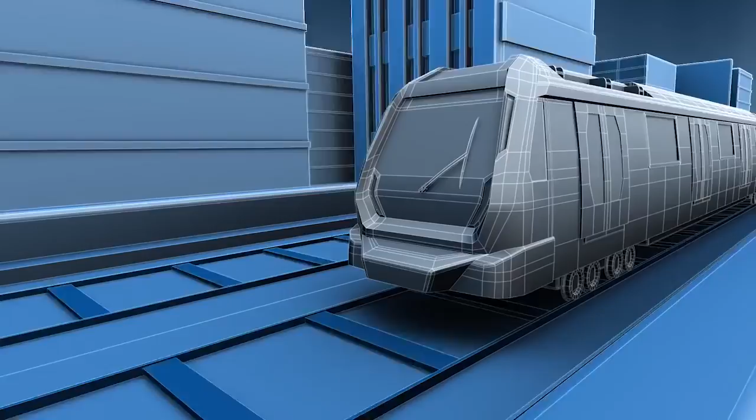A new transportation network is under construction in Kuala Lumpur. It is the KV MRT, the Klang Valley Mass Rapid Transit. The KV MRT's first alignment, the Sungai Buloh Kajang line, stretches a distance of 51 kilometers with 31 stations. A major section of the line is constructed above ground, while 9.5 kilometers is built underground. The KV MRT is part of a new transportation model that will change the infrastructure landscape of the Klang Valley.

I wanted a game changer, and I realized that for any modern metropolis to be vibrant, to be competitive, to be on par with some of the leading cities in the world, you've got to have a modern public transport system. The alignment will traverse through some of the most congested areas in the Klang Valley, challenging Malaysian engineers to deliver one of the most advanced infrastructure projects of the country.

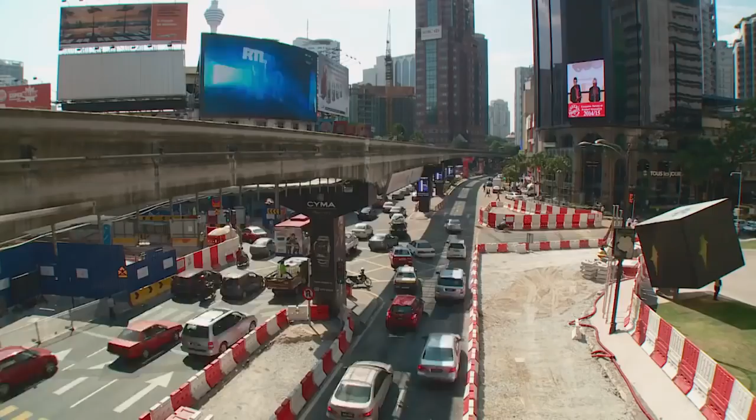Klang Valley or Greater Kuala Lumpur, a fast-growing metropolitan and home to 7 million people, with an expected increase to 10 million by 2020. This city is notorious for its traffic congestions. Every day, about 3 million cars enter the city centre. We need a good public transport system for Kuala Lumpur and the Klang Valley, because what we had was a public transport system which was not integrated.

In 2010, the Malaysian government initiated the Economic Transformation Program, ETP, to elevate Malaysia into a developed nation by year 2020. The objective of the program is really to transform the economy of Malaysia to become a high-income economy that is inclusive, at the same time sustainable. We could not help but identify Greater Kuala Lumpur or Klang Valley as one of those national areas of focus.

Part of the Economic Transformation Program, ETP, is to construct a mass rapid transit MRT system to create an integrated public transport network. We were quick to realize that it was just absolutely necessary for us to build a mass rapid transit in Klang Valley. We didn't think there was any other option. We couldn't rely on other forms of transport such as buses and taxis to do it. We really have to move a lot of people within the city so that it becomes a lot more livable.

The MRT system for Greater Kuala Lumpur will first include 2 new MRT lines spanning 103 kilometers, serving a radius of 20 kilometers of the city centre. With the construction of these lines, people will be able to travel between populated residential districts, commercial centres and key employment areas within the Klang Valley. The KV MRT project will play a vital role in creating a vibrant Klang Valley metropolis. Not only will it benefit its residents, but also propel the nation's economy with immense spillover effects on sectors such as the construction-related industries.

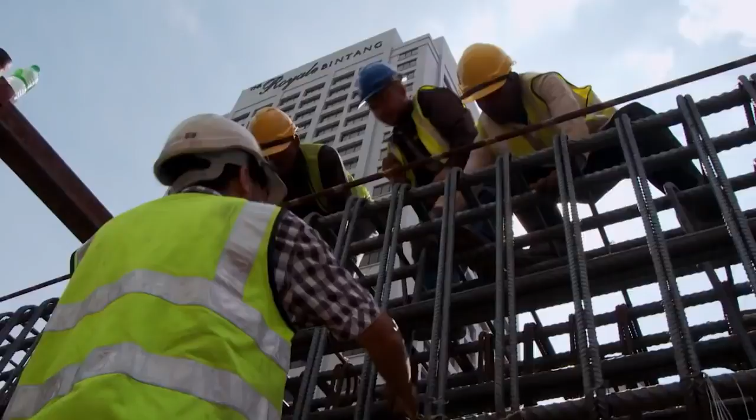In July 2011, the Prime Minister of Malaysia, Datuk Seri Najib Tun Razak, launched the biggest infrastructure project ever undertaken. It was his vision to improve the connectivity within the Klang Valley and radically enrich the lives of the people. The KV MRT's first alignment is the Sungai Buloh Kajang line. It will stretch 51 kilometers with 31 new stations, serving a population of 1.2 million people. The majority of the line is constructed above ground, while 9.5 kilometers is built underground.

To execute the government's mandate to complete the KV MRT project, MRT Corporation was formed with Datuk Seri Shahril Mokhtar currently helming the position of the Chief Executive Officer. Basically, MRT Corp is owned by Minister of Finance Incorporated. So our role is basically as an asset owner, as a project developer. And we are a so-called liaison entity between the project partner and also the government.

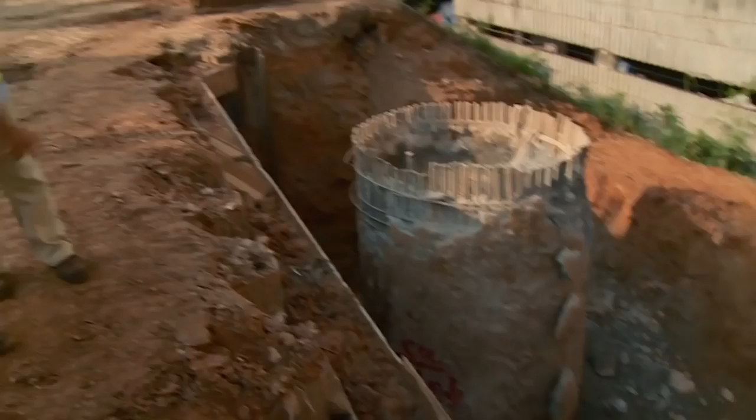On 10th February 2012, MMC Gamuda was appointed as the Project Delivery Partner, or PDP, for the Sungai Buloh Kajang line. The PDP approach is the best approach when it comes to building a major infrastructure project. The key element here is about risk. We basically transfer the risk to the project delivery partner in order for them to deliver the project within time, within budget, and they take up most of the risk.

A special MRT Exco committee was also set up to ensure that this project moves swiftly and smoothly. MRT Exco is very crucial in the whole spectrum of this project. The idea of having this MRT Exco is just to solve issues. It doesn't take long, maximum an hour, once a month. That is a very good platform in order to expedite the project. But constructing a new transport system in the Klang Valley is not an easy task.

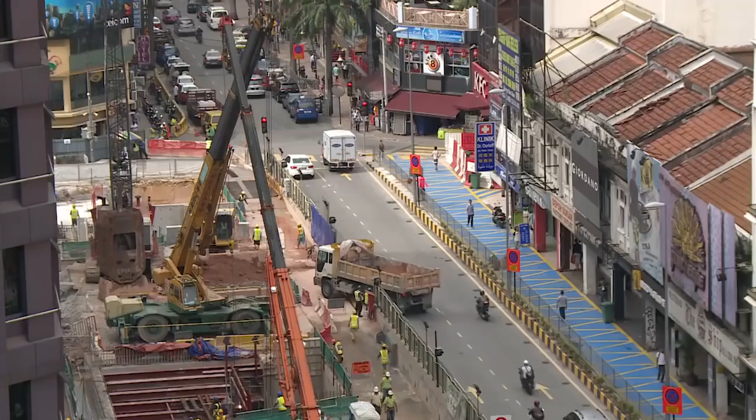Some parts of the KV MRT viaducts and stations weave through highly congested traffic areas. To ensure that all parties, whether it is the community or businesses adjacent to the MRT alignment, are well informed of the construction activities, stakeholder engagements are carried out. Community engagement to me is a very, very important part of the whole construction process itself, because you can't build something through a community without engaging them.

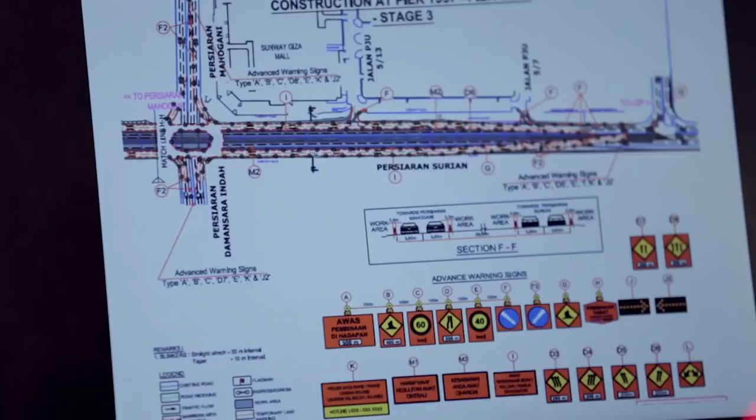For Line 1, over 3,000 engagement sessions have been held with residents, resident associations, business people, traders and other groups. To ensure that the construction of the KV MRT will create minimal disturbance, an extensive traffic management plan was put in place. Before we start any construction, we would have to plan the traffic management meticulously.

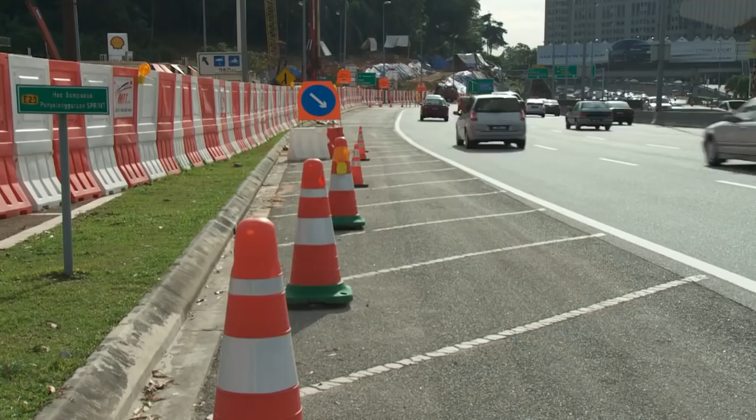What we do usually is we sit down in a room and do the desktop planning to tie in with the construction sequence. Then we do simulation. This is then followed by a trial road closure. This trial closure is to see what is the impact when we actually do it. This is done to validate our study and our simulation. Once the trial is successful, then we go for full implementation.

One of the most challenging traffic diversions ever to be implemented is at the Persiaran Surian nearby Sunway Giza. This is due to simultaneous construction of an underpass. That particular area, we are building the station. We are also building an underpass for the local authority, which is part of the project. And we have had to do the traffic management in 2 major stages.

In all this, we have a traffic management team on standby 24 hours to make sure that nothing goes wrong. If there's anything that we did not plan earlier, then we can take care of that immediately. Road user safety is always the #1 priority. Our work should not put the public at risk, and therefore that's why we would close roads. We would hold up traffic. Yes, it's an inconvenience, but it's for the safety of the public.

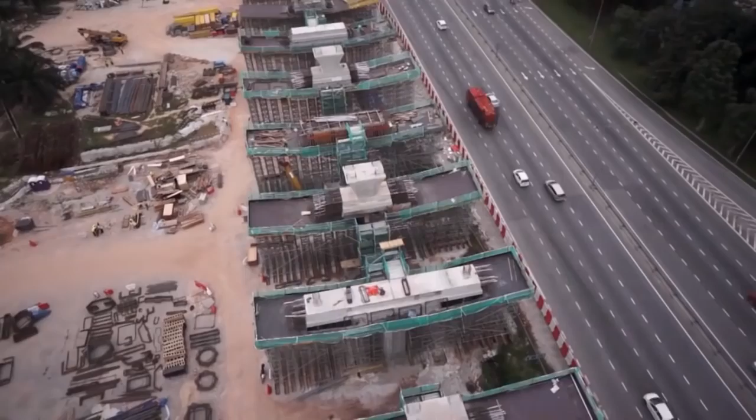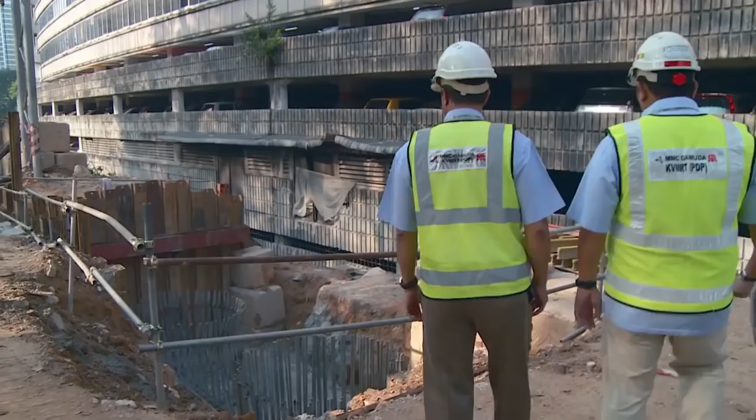The elevated section consists of 1,400 piers to support 17,000 segmental box girders that form the viaducts. There are 24 elevated stations and 2 depots, one at Sungai Buloh and another at Kajang. To ensure the success of this project, a strict procurement process was implemented. Companies were subjected to stringent evaluations to ensure that only the best, most experienced and competitive contractors were selected.

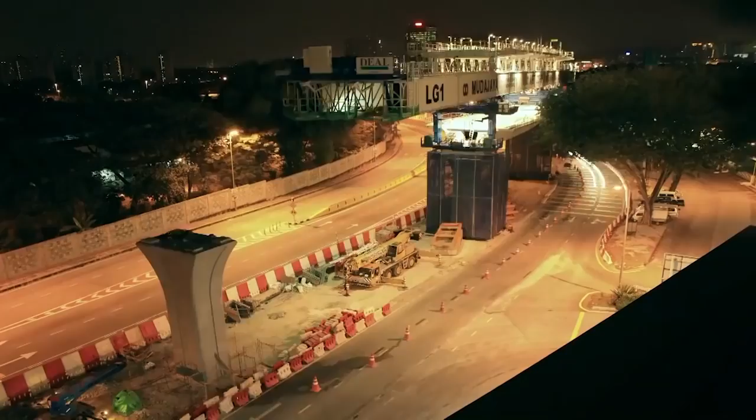There are 8 different work packages in the elevated section, divided into the northern package, which runs from Sungai Buloh to Semantan, and the southern package, which runs from Cheras to Kajang. 400-ton launching gantries were used to build permanent viaduct guideways by erecting the segmental box girders or SBGs. The gantry is basically a sort of a crane lifting mechanism. It lifts all the units together. It aligns them so they're all in a nice line. And at our peak, we had 21 gantries. That's a lot of gantries.

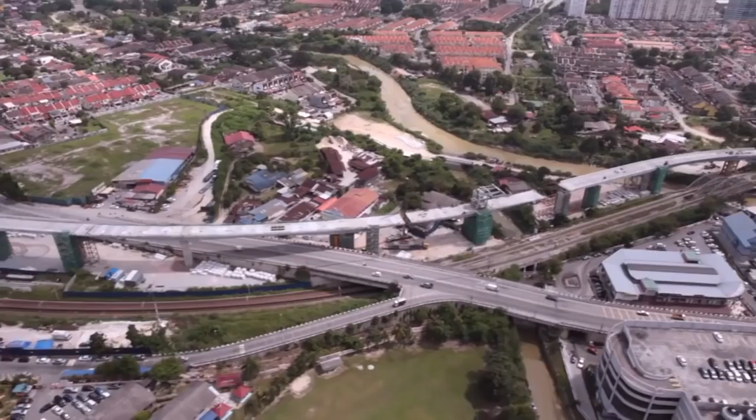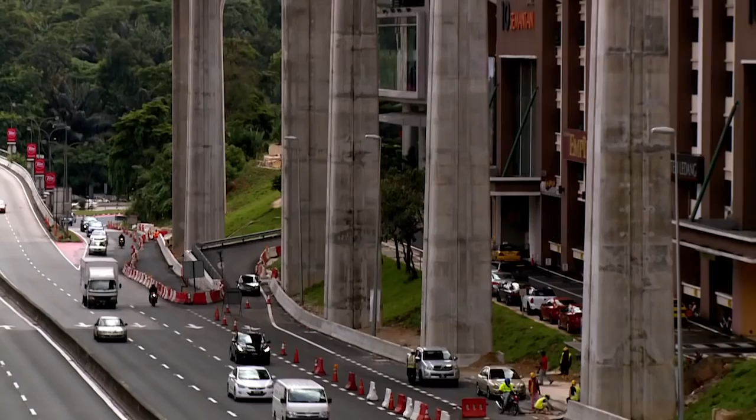The elevated guideways have to be built over existing roads and overpasses, making construction a challenge. The alignment itself must pass above the existing structure, name it a bridge or the highway. We have to pass above it. At certain areas, the viaducts are built at extreme heights. When we talk about the gradient or the slope for a road, it can go up to 10%. But for train, it cannot go more than 3% because of the way the train operates. Okay? Otherwise, on rainy days, it will slip. That's why in some areas you will see that the piers will be very, very high to make sure that the vertical alignment is maintained throughout the whole stretch.

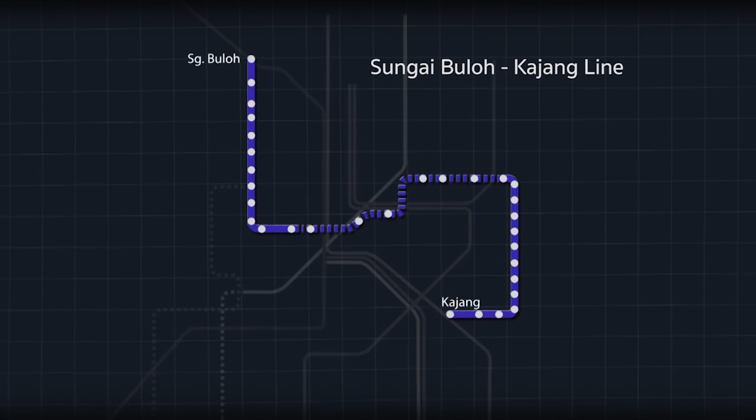While the majority of the line is built above ground, 1/5 of the Sungai Buloh Kajang line is constructed below ground. This is the biggest challenge faced by the construction team. The KV MRT's first alignment, the Sungai Buloh Kajang line, stretches a distance of 51 kilometers. To accommodate the construction within the city centre, 9.5 kilometers of the alignment is underground. For city centres, really the best thing is to put it underground. You don't have to demolish too many buildings. We're not looking to destroy areas, we're looking to enhance areas.

The design and construction of the underground works was awarded to MMC Gamuda KV MRT Tunnelling Sendirian Berhad for their extensive tunnelling experience and technological know-how. The underground section stretches from Semantan to Maluri while passing through 7 underground stations: Museum Negara, Pasar Seni, Merdeka, Bukit Bintang, Tun Razak Exchange, Cochrane and Maluri. To build the tunnel, tunnel boring machines or TBMs were used to excavate rock and soil with special tools fixed on a rotating cutter head.

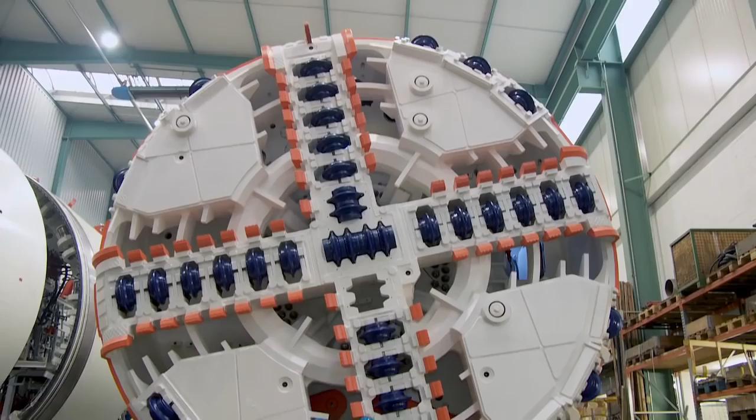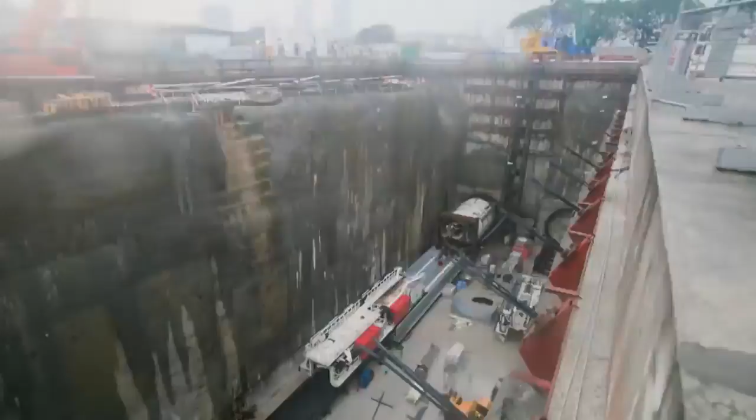MMC Gamuda KV MRT, working with German company Herrenknecht, came up with a revolutionary kind of machine, the variable density TBM, the first of its kind in the world. The first variable density TBM arrived in Malaysia in the beginning of 2013. Transporting the TBMs to the sites through Kuala Lumpur was a challenge that needed detailed coordination. After 3 months of assembly, the first TBM was ready to begin mining.

The launch of the first variable density TBM was officiated by the Prime Minister of Malaysia, Datuk Seri Najib Tun Razak on 30th May 2013.

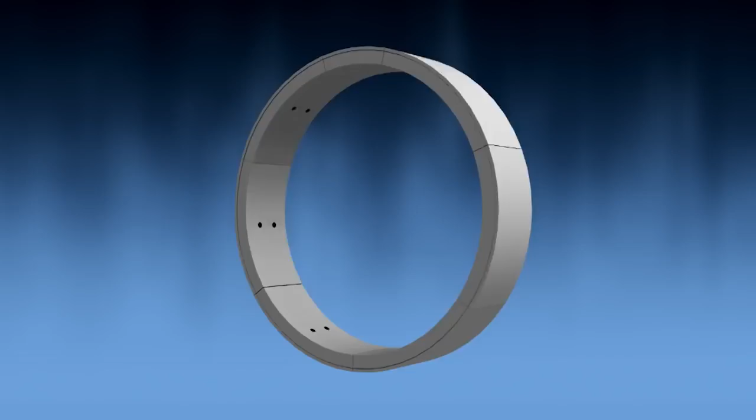The TBM is equipped to both excavate and build tunnel rings, which form the lining of the tunnel. Each ring consists of 7 segments and 1 keystone. A total of 11,500 segments were needed to line the dual 7.8-kilometer tunnels. Tunnel walls need to be strong enough to withstand extreme pressure and chemical attacks from the ground and water, and to also endure settlement caused by poor ground conditions.

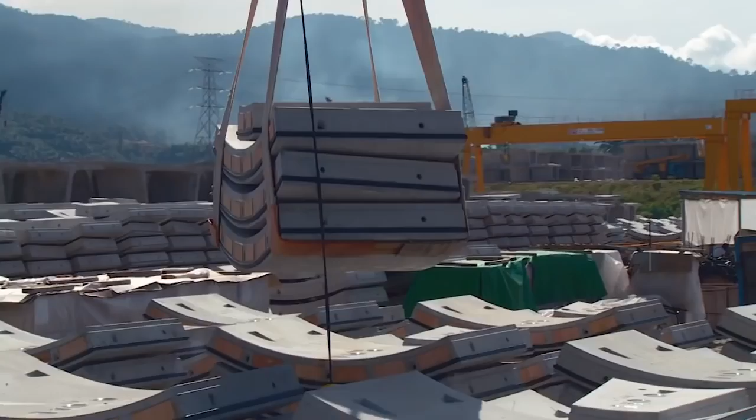The tunnel segments were manufactured off-site at 3 different factories. We are adopting the technology we call steel fiber reinforced concrete, where we use a staple-like steel fiber to replace conventional thick and heavy rebar. On top of that, we are using another fiber called polypropylene fiber to improve the fire-resistant properties of our segments.

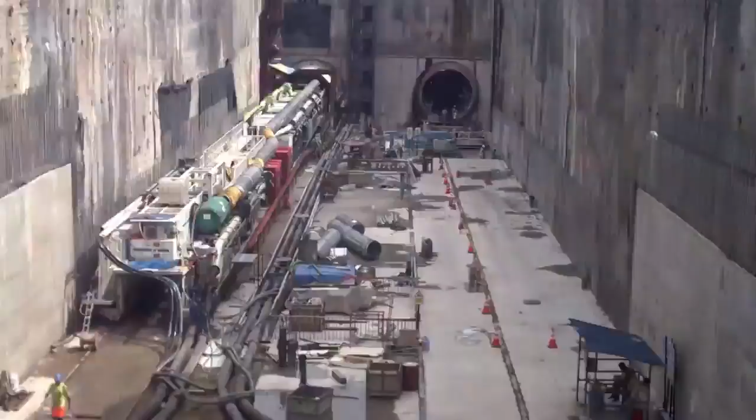8 TBMs were used for this project. 4 TBMs were launched from Cochrane, 2 TBMs from Semantan North Portal, 1 TBM from Inai Shaft, and 1 from Pudu Shaft. The MRT tunnelling project required thousands of workers over the 2-year period of construction, and MMC Gamuda set up an academy to train the hundreds of local workers needed for the underground construction works.

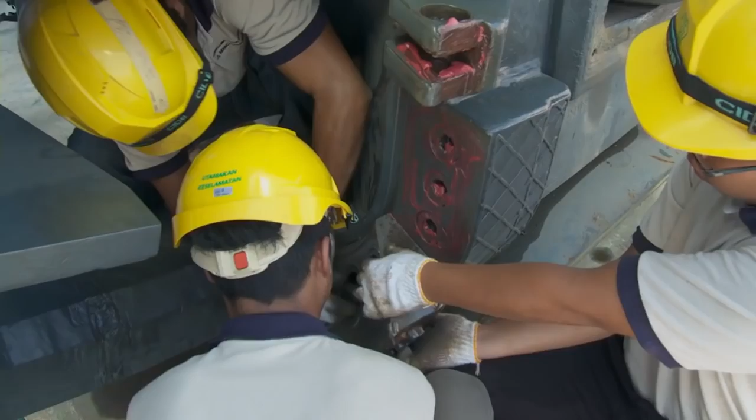The Tunnel Training Academy, TTA, was the first of its kind in the world, with the aim to develop a workforce of highly skilled Malaysians who are proficient in the specialized field of tunnel construction. To date, over 16,000 professional and skilled workers have been trained at the TTA in various fields to support the tunnel and underground construction works, in particular for the KV MRT project.

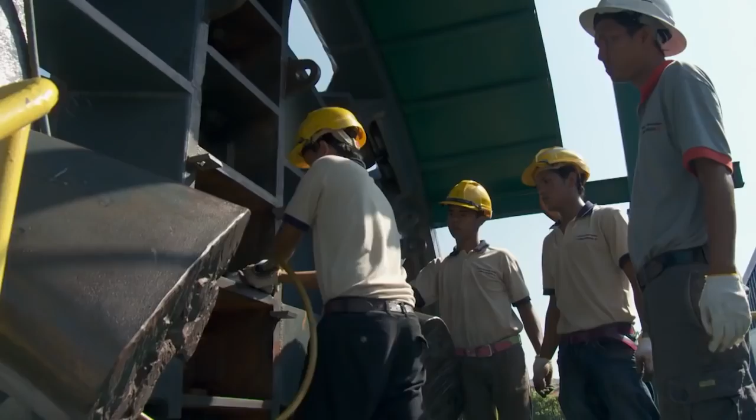I think the training of locals is very important. You need people to have the expertise. They've gone through the training school to learn the basics, and then they've actually been put out on site and seen it in action, and that's enhancing their skills.

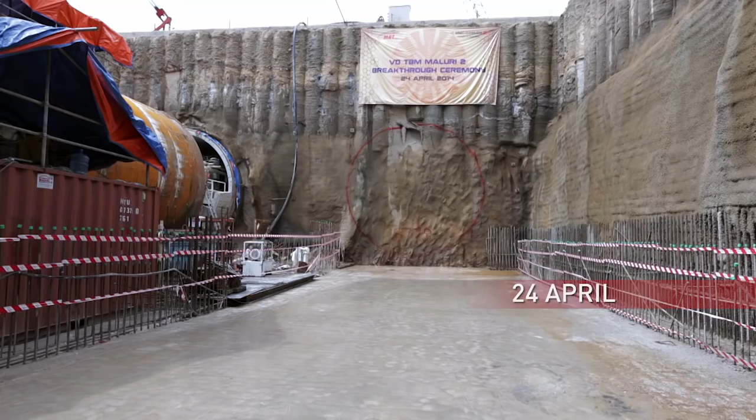The first 2 TBM breakthroughs were at the Museum Negara station on 24th December 2013 and 16th January 2014. The machines were then pulled through and relaunched to continue tunneling towards the Pasar Seni station. On 24th April 2014, the 5th breakthrough occurred at Maluri South Portal with a big splash. This was the midpoint of the tunneling works.

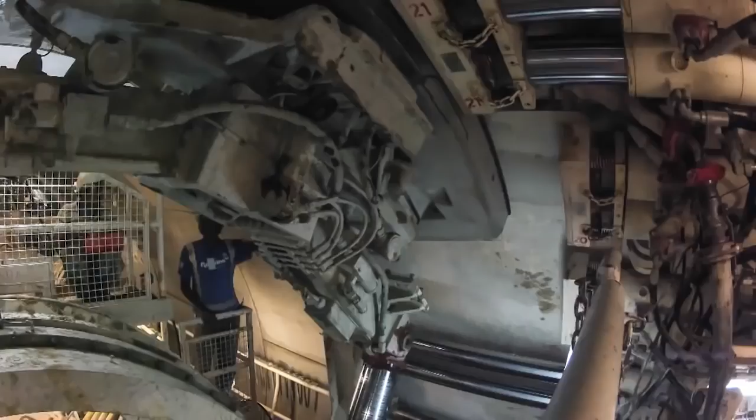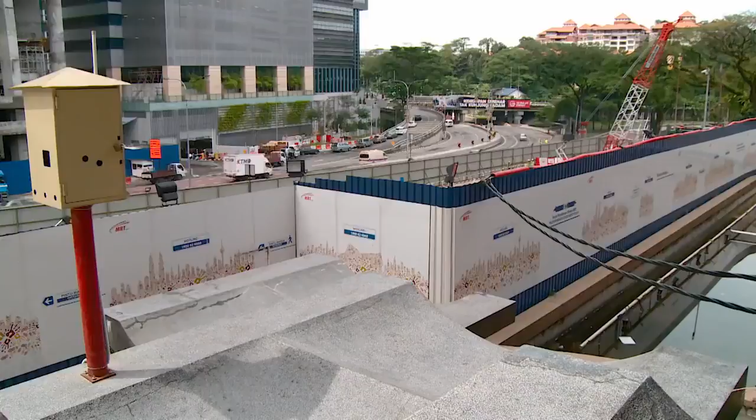While construction of the tunnels is in progress, work is carried out on the 7 stations. Located right beside the Museum Negara, the station is connected to the KL Sentral Transport Hub. One big challenge here is to ensure the safety of the National Heritage Building. Daily monitoring works are carried out on the structure and the mosaic murals. During the construction, we have allocated more than 200 instruments to monitor the Museum Negara building condition through all the days of our construction.

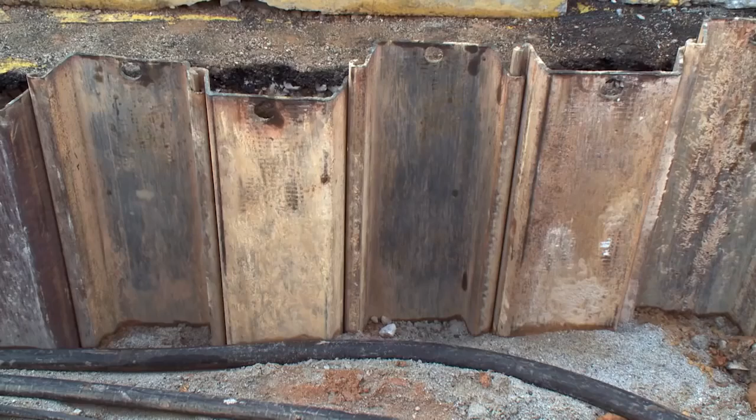The Pasar Seni station is located in Chinatown and connects to the existing Pasar Seni LRT station. Construction of this station required extensive protection of electrical cables that are part of the national grid. While we were doing excavation, we got a big surprise. We found a 132 kV cable. This cable carries power for a third of Kuala Lumpur. A power cut here could cripple part of the city. We cannot afford that to happen.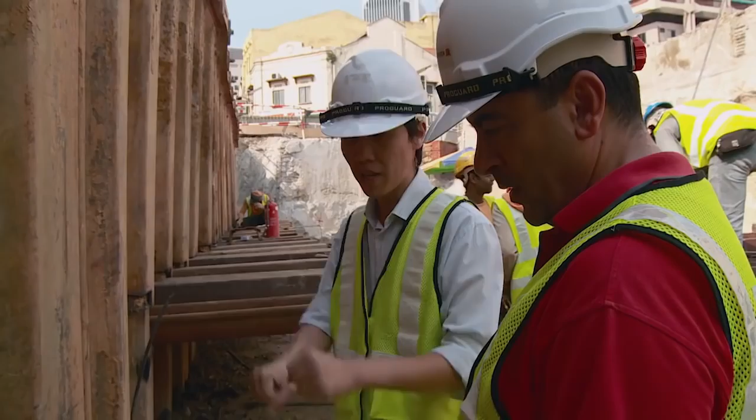A steel protection box had to be constructed to protect the 132 kilovolt cables located beneath the road. The authorities insisted the cable stay in place. It cannot be moved at all. So the only option left for us was to build a steel box to support the cable so that we can work and excavate underneath.

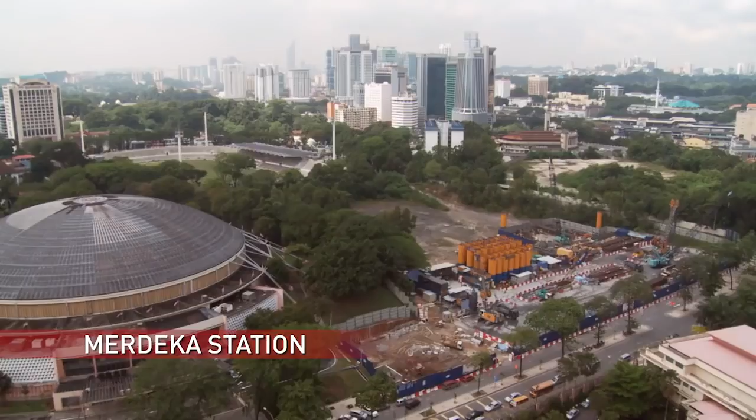All excavation works at the Pasar Seni station have been completed without any power disruption to the city. The Merdeka station is located close to the Stadium Merdeka and Stadium Negara. Over 30 meters deep, steel struts were required during the excavation works. The main challenge of this station is to construct 6 layers of strutting. We use up to 4,000 tons of steel in order to provide the earth retaining system strutting for our station.

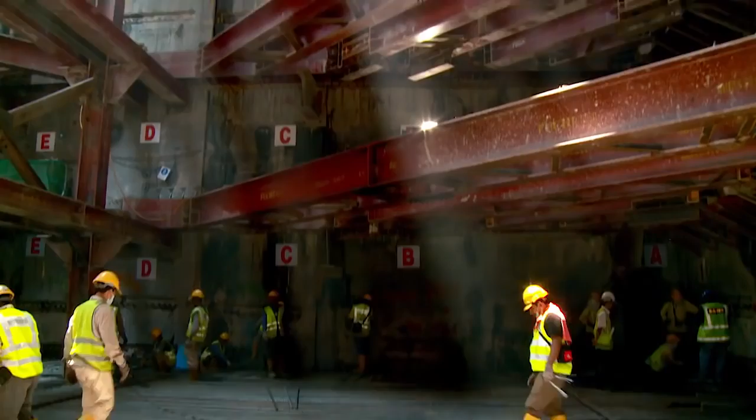Located in the heart of the Golden Triangle, the Bukit Bintang station is constructed in phases to ensure that traffic is not disrupted. So the challenge for this area is traffic, definitely, because we have restricted hours. There are a lot of cars, and also a lot of public. Our challenge here is basically to maintain the environment with minimal disturbance.

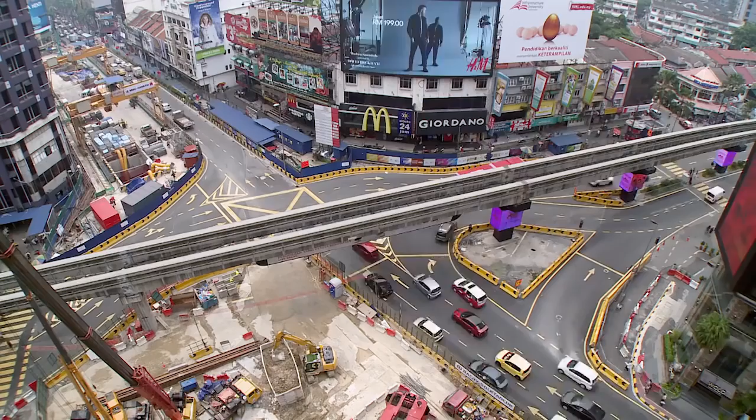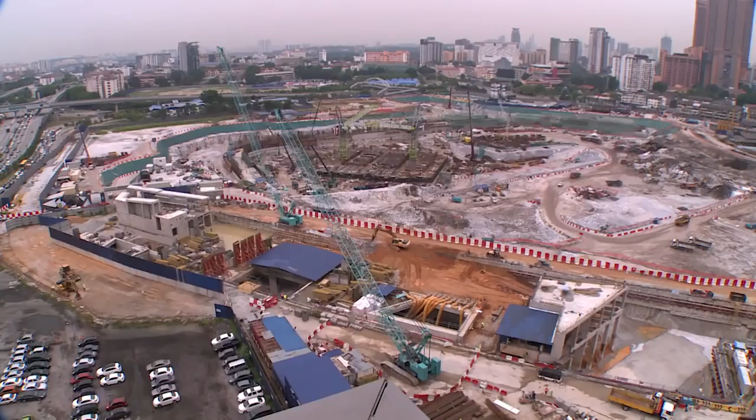The Tun Razak Exchange Station is located nearby the future Tun Razak Exchange development. This is the deepest underground station with a depth of 45 meters. It is built to connect with the future Line 2, the Sungai Buloh Serdang Putrajaya line. The Cochrane station is within an area being transformed by large urban regeneration projects. Over 35 meters deep, the station works are moving forward quickly. Located beneath Jalan Cheras, the Maluri station was constructed in stages to ensure continuous traffic flow.

On 11th April 2015, the last TBM finally arrived and broke through at the Pasar Seni station. It is a thrilling moment for the engineers and tunneling team. The machine is the first TBM launched in the project from Cochrane, and it has mined the longest distance of 5 kilometers. I'm very happy. My team performed very well, and in fact for tunneling we are a few percent ahead of schedule. And it's all dedicated to this team of people who work so hard.

This is the last breakthrough. I have attended a few breakthroughs, all done very well. It's very good, we have proven ourselves. You can see 10 TBMs have already been successfully implemented and completed without any problem to the surroundings. So you can see it's proven already. So I think we are very happy now. And we are very confident that we can do more in the coming future.

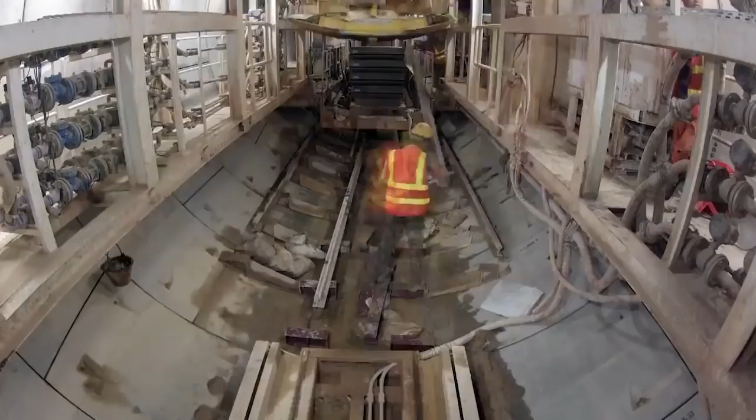The success of the variable density TBM resulted in a 95% reduction in the incidence of sinkholes for the KV MRT Sungai Buloh Kajang line compared to tunneling for the SMART tunnel under the same geological conditions. The astounding innovation of the variable density TBM was internationally recognized and was awarded the International Tunneling and Underground Space Awards 2014 for the Technical Innovation of the Year category.

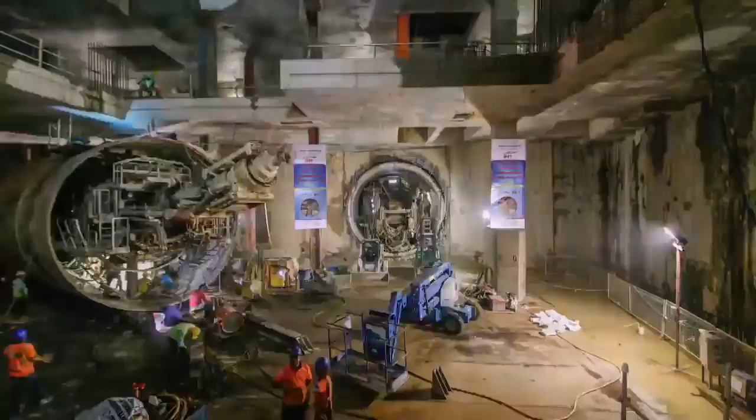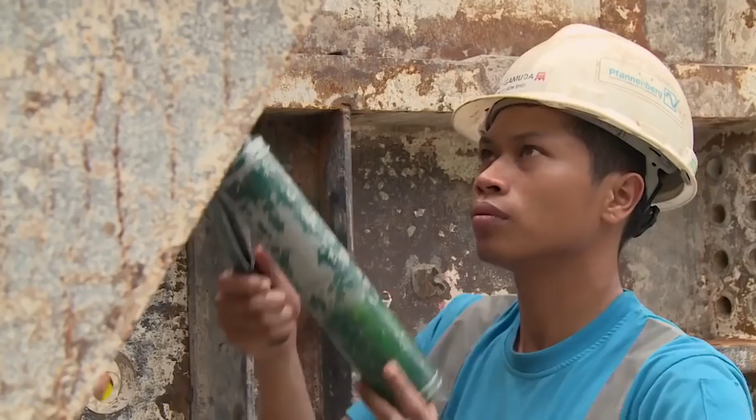As tunneling works have been completed, the TBMs were retrieved and sent to the TBM refurbishment plant located in Pusing, Perak. Here, the TBMs are being cleaned and their sensitive electrical components disassembled for storage in preparation for future projects. The facility, the first in Malaysia, will enable the transfer of TBM refurbishment technology to Malaysians.

As work progresses at the underground work sites, accidents are the biggest worry for the construction team. To ensure that the teams are prepared, drills are carried out regularly. Accidents at the underground sites can be catastrophic to the construction progress. To ensure that the teams are prepared, emergency and rescue drills are conducted frequently. Every 6 months, we have to carry out the emergency drill to give exercise to all of our workers. If an actual incident happens, we are prepared for the incident.

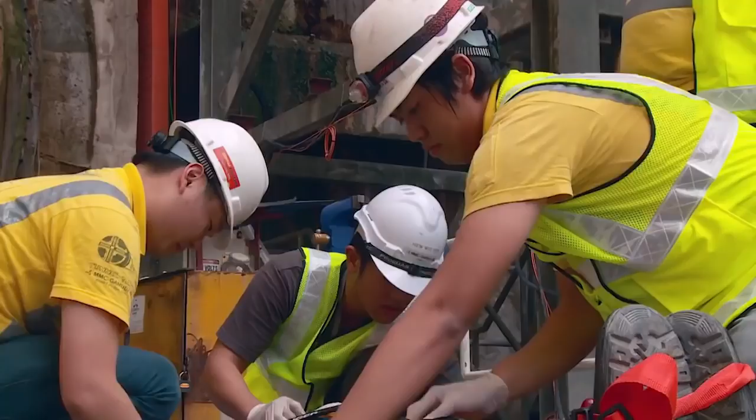The teams are tested on how well they can respond to an emergency and to evaluate their actions and response time. We want to ensure that the emergency response team is always prepared and ready in the event that a real emergency happens. At all the underground sites, engineers and workers are trained on safety awareness. MMC Gamuda KV MRT Tunneling Sendirian Berhad has raised the delivery and safety benchmark for the local construction industry to be on par with international standards.

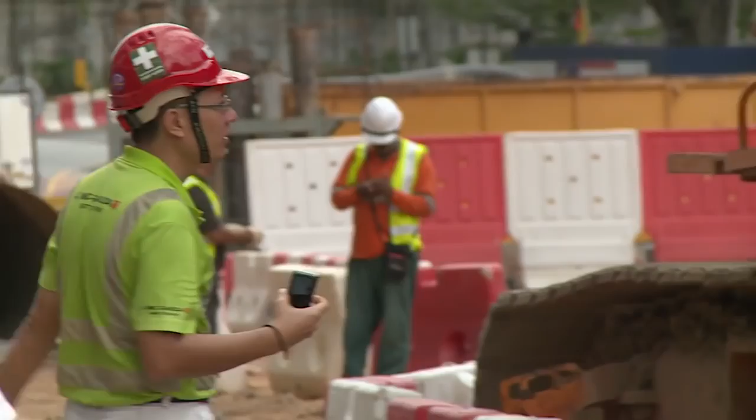Monthly audits are done by safety officers at each site to ensure they adhere to all safety requirements. This is our company policy to ensure that workers are safe to work here. So we are doing a routine monthly audit to ensure those safety rules and regulations are complied with, to ensure the site is safe to work. Of course, the workers are our valued asset, so we make sure those who are working here are safe. In April 2015, MMC Gamuda KV MRT was announced a winner of the International Safety Award with distinction from the British Safety Council in recognition of its commitment to health and safety management.

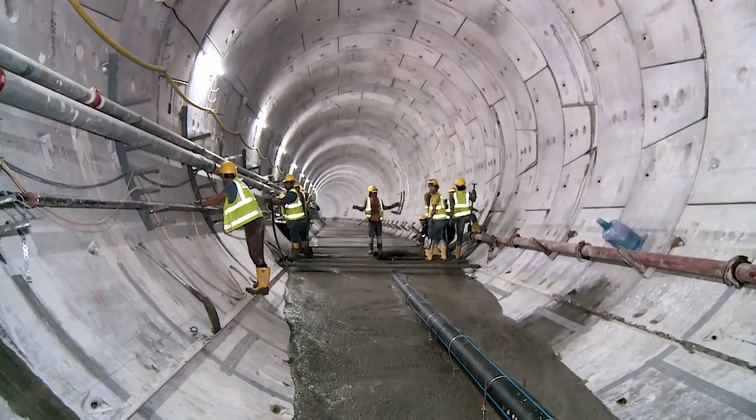Once tunneling had been completed, concreting of the tunnel base was carried out. Laying of the tracks for the underground section and the elevated sections were done concurrently. On the main line end to end, we use the slab track, using resilient base plates to mount the rail so as to minimize any noise and vibration of the track. To reduce noise pollution along the alignment, noise barriers are also installed.

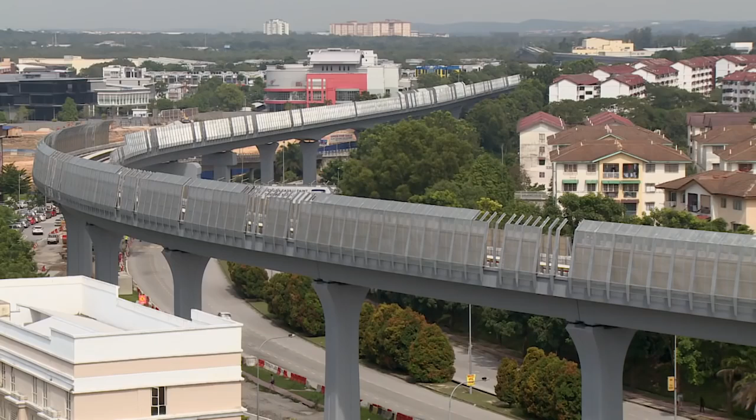When we were doing the design, there were certain areas that were very close to residential areas. And what we did was we engaged noise consultants to do simulations to see what the noise level would be when the trains start operation. The Institute of Noise and Vibration, Universiti Teknologi Malaysia, is a national center of excellence in noise and vibration. And we undertook detailed analysis to determine locations that may be affected by noise and vibration along the entire alignment. We were then involved in the detailed design of noise and vibration mitigation measures along the alignment.

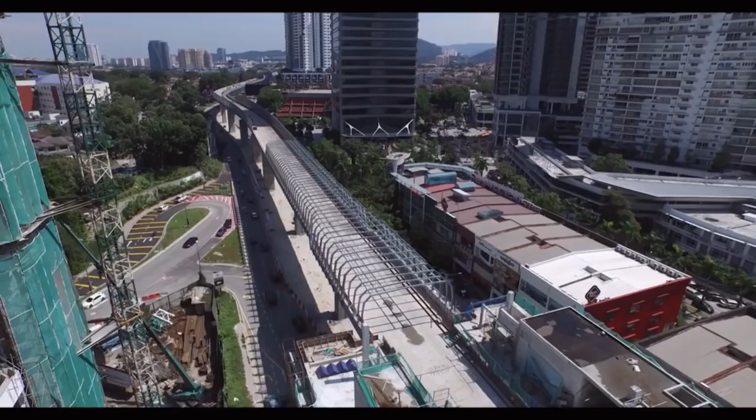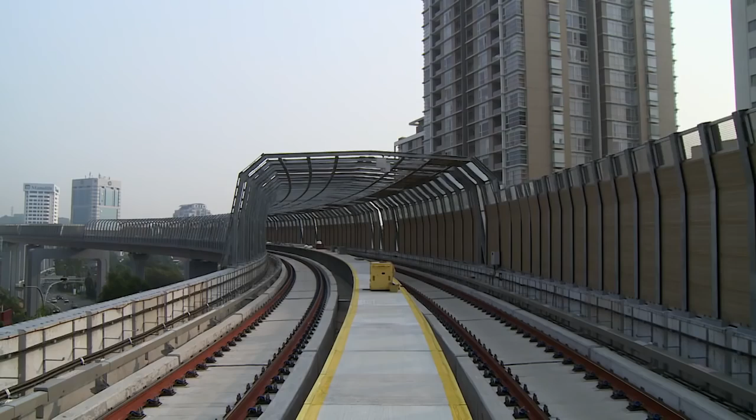As advised by the consultants, 3 types of noise barriers were installed to control the noise propagated by the train operation. The first type is a short vertical kind of barrier. The second is a bit higher. It has a small canopy towards the inside that mitigates the noise further. And the third category is a full enclosure to maximize the suppression of the noise generated.

Along the Sungai Buloh Kajang alignment, there are 24 elevated stations that all have a unifying design and look. They wanted an identity to the station, and they wanted a master identity to the line. So the way we always look at design is that we look at the essence and we look for something that's going to express something Malaysian about the station.

The design and concept of the elevated stations are inspired from the Malay Wakaf, a traditional shelter for travellers. The idea of the station was, we call it wakaf, wakaf being a sort of pavilion structure that you find usually in the landscape, synonymous with paddy fields and things like this. But the idea of wakaf is also that the transportation is a sort of a gift to the people. It's something for the people.

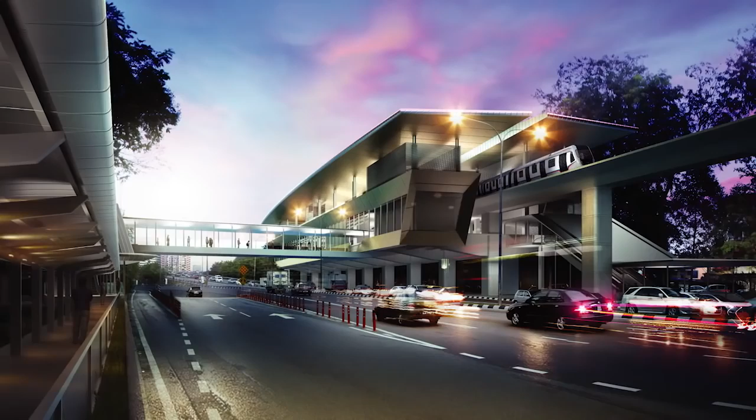In keeping with the Malaysian identity, the station design is in tune with the country's environment. It should become a tropical station. You know it's a tropical station. So what's the first thing? It's big overhang roofs, natural daylight, naturally ventilated, some sense of greenery, public plaza attached to that. So these were all a series of ideas under the umbrella of the concept of a wakaf.

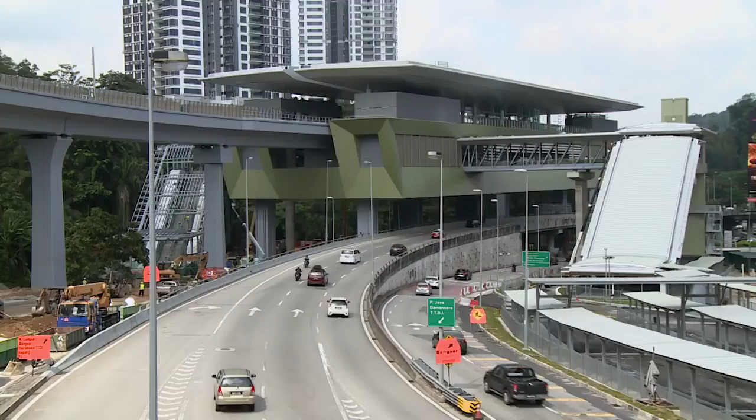Sustainability was also a main consideration. A repetitive design, obviously, there is some efficiency to doing that kind of design. In terms of construction, you can do all the prefabrication of all of this off-site. So there is a sustainable component to making all of them consistently in one kind of design. The extended overhangs of the station's roof will help reduce direct sunlight and incoming rain.

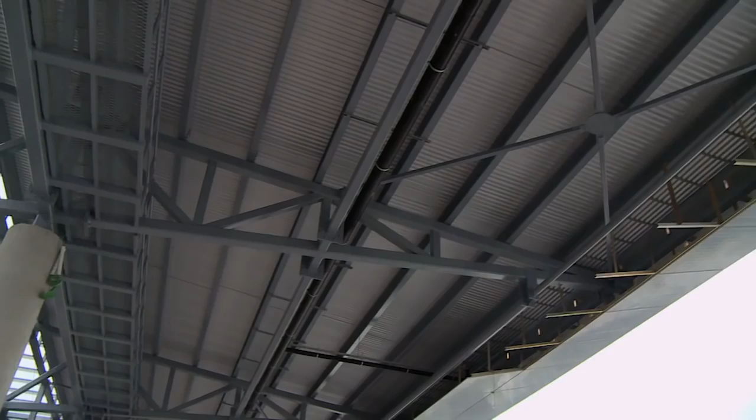These structures have huge roofs. They are collecting rainwater for basically all the toilet facilities and water use within the building, and later to harvest solar with PV cells on top of it. So all of that they already actually integrated into the design.

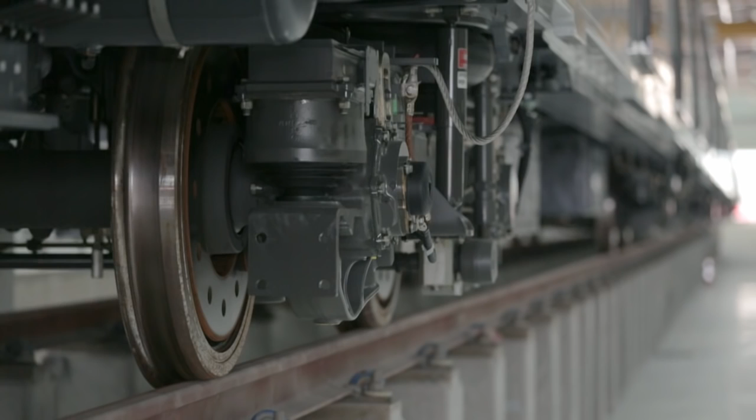To minimize power consumption, the train traction power system has also been designed to accept regenerated electricity as the trains decelerate. They're actually implementing brake energy, energy from the brakes of the trains itself, onto the energy collection for the buildings. So they're adopting a few of these elements of sustainability within the building.

For the underground stations, the architectural design concept for the ground-level entrance structures is inspired by the multifaceted quartz formation of Kuala Lumpur's Klang Gates Quartz Ridge. The 16-kilometer long ridge is the longest of its kind in the world. We took inspiration from it, in that the multifaceted shape of the quartz crystal and its multi-coloured reflections sort of resonate with the multiracial spirit and the cultural richness of Malaysia.

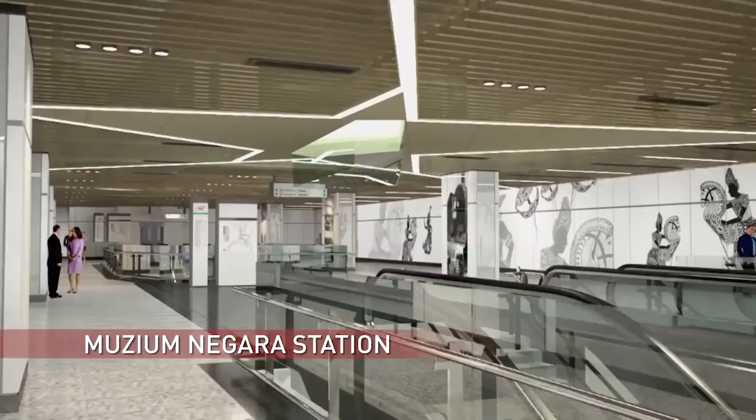Each underground station has individual design themes that reflect each station's unique site and historical context. Muzium Negara Station is located next to the National Museum. The theme, Transition, is based on the museum as a treasure trove of all things old in contrast to its neighbouring new development. At its concourse level, columns with glass cladding depicting modes of public transport from yesteryears provide a sense of nostalgia in an otherwise sleek and contemporary station interior.

Pasar Seni Station is located nearby the meeting point between Sungai Klang and Sungai Gombak, thus the theme Confluence. Being the birthplace of Kuala Lumpur, the concept of the interior design is a tribute to this confluence by stylizing its Y shape into a contemporary design motif.

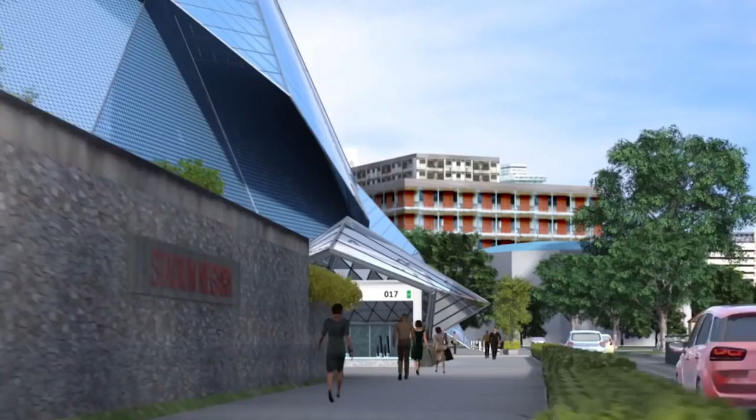Merdeka Station is located nearby Stadium Merdeka, where independence was proclaimed in 1957. The theme for the station is Independence. Here, patriotic images will be featured, including the proclamation of Merdeka by the late Tunku, as well as text of the Rukun Negara. This station will be integrated with the future KL 118 development, which will be the tallest building in Malaysia.

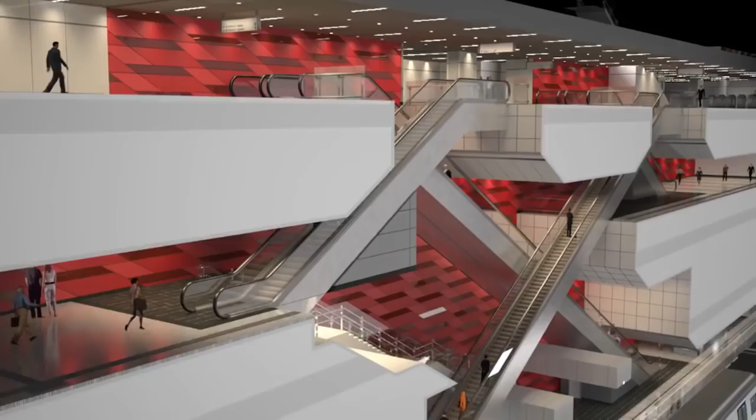The Bukit Bintang Station is located at the Golden Triangle of Kuala Lumpur, a place that never sleeps. The theme of the station is dynamic. The ever-present dynamism and vibrancy of this area is expressed in a bold, 4-story high feature wall composed of a dynamic trapezoidal geometry in different tones of red that suggest movement.

The Tun Razak Exchange Station is located at Kuala Lumpur's future financial district. As Malaysia is at the forefront of Islamic finance, the theme of this station is Islamic Corporate. The station design will project an Islamic identity with contemporary, formal and corporate ambience. Islamic motifs will be expressed in the columns, walls and ceiling.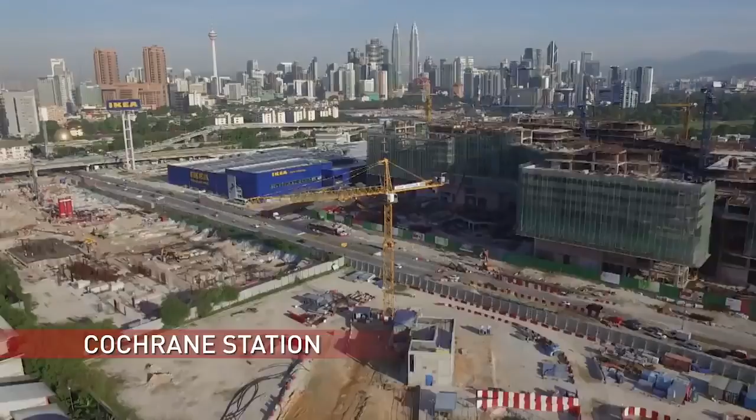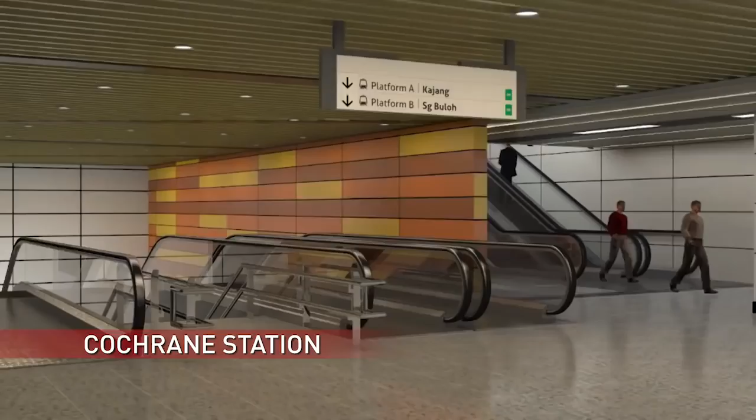Both Cochrane and Maluri stations are located in parts of Kuala Lumpur which are currently being transformed by 2 large urban regeneration projects. It is envisaged that both stations will play a major role in injecting vibrancy to the site contexts. The theme for Cochrane Station is urban living, while for Maluri Station is new generation. In both stations, a combination of colours are used to bring a fresh, fun and cheerful ambience.

Another unique feature of the underground stations is the concept of incorporating ideas by local young talents to design the bench for each of the stations. An Art Express initiative, a bench design competition was introduced by MMC Gamuda KV MRT. We decided to invite younger talent, younger brains from colleges and universities to participate in a competition where they could come up with something.

After going through a judging process, the final 3 designs were displayed at NU Sentral. Here, the public were able to vote for their favorite bench design. I think it's great in having different designs, a variety to choose from, and having it displayed, the public can choose from it.

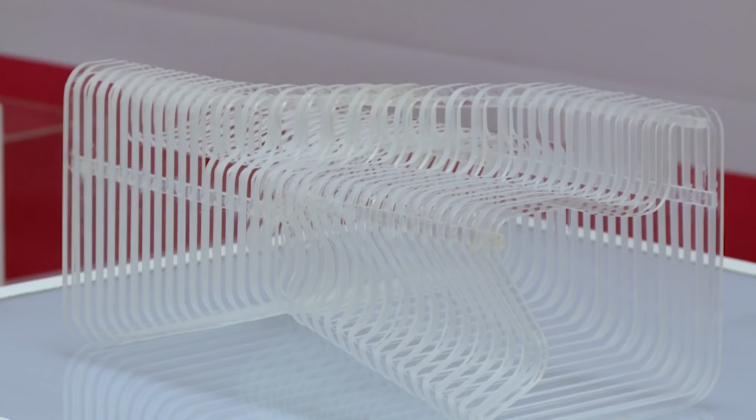MMC Gamuda KV MRT, together with MRT Corporation, finalized the winning designs on 26 February 2016. We've had 6 winners, and I think we've seen some great talent today, some great designers for the future. I think everybody's very excited. They're very proud of what they've produced. I'm very happy because I think we've got some really nice designs that are going to go into our underground stations.

On 15th December 2015, emergency rescue responders from 8 fire stations were rushed to the Phileo Damansara MRT station. An emergency rescue scenario is underway. A fire has broken out at the station platform, and the driver of an approaching works train slams the brakes, causing 2 workers on board to fall and be trapped.

These exercises are also critical for the emergency rescue services. We need to do this drill because we need to be familiarized, and also we need to help Bomba to familiarize on how to act in events of emergency, especially on the viaduct.

This is something quite new in Malaysia, to rescue people from the viaduct at an elevated platform. The emergency drill was a success. This effort is part of the MRT Corporation and MMC Gamuda's initiative of introducing a zero-tolerance program. It's of utmost importance because when we talk about safety, we're talking about people's lives.

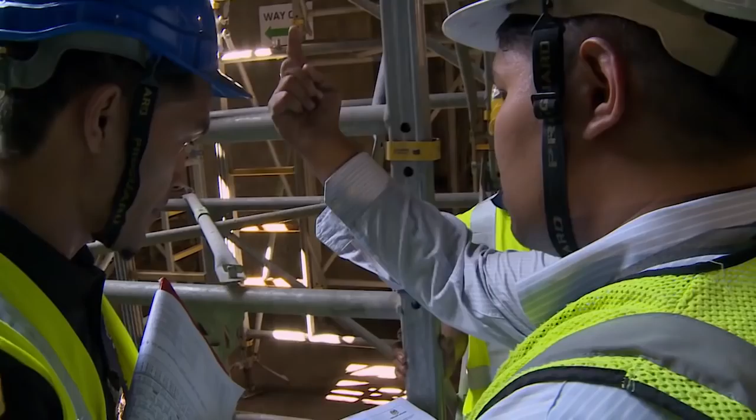Anything could happen because these boys on the ground, they work 24/7. We can't avoid incidents, yeah? But we must be able to find a way to mitigate the risk of having incidents. With this program, tighter supervision, streamlined checks and approval procedures are done to ensure worksite efficiency and that safety compliances are met.

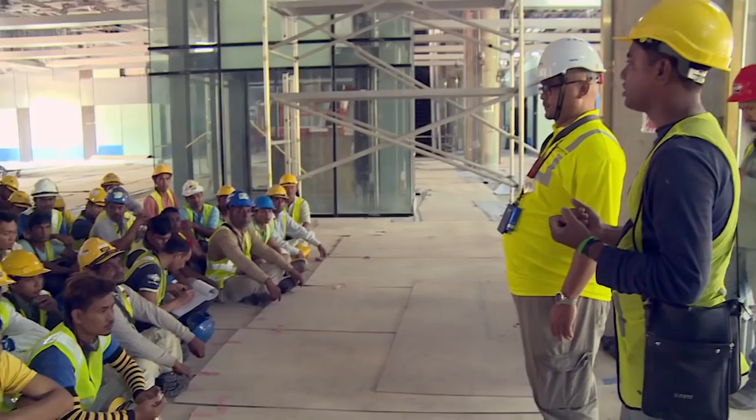Apart from the team that the contractors have on the ground looking after the safety of everybody involved in the project, we are going to put in additional personnel to make sure that they focus on certain very, very high-risk areas and high-risk activities. The Zero Tolerance Program allows safety superintendents to halt works immediately if construction does not comply with the method statement and safety measures. Toolbox talks are also carried out on a daily basis at the beginning of every work shift.

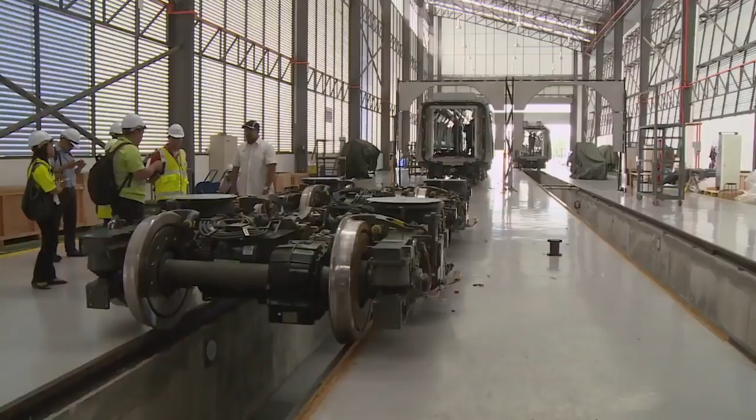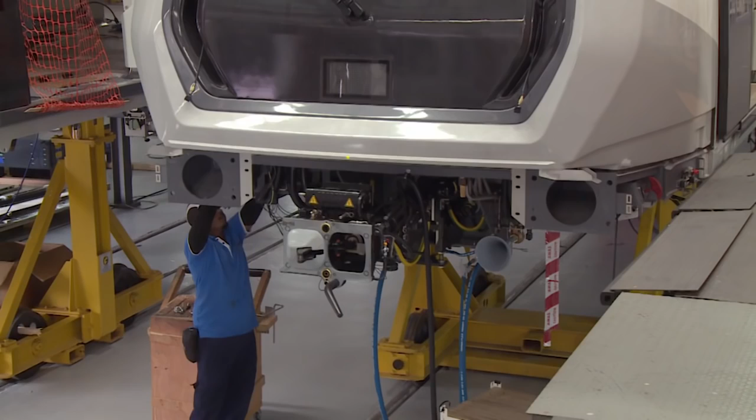Components of the train come from all around the world. The mechanical and electrical components come from several countries in Europe, while the train's car body comes from China. The parts are shipped and assembled together at Malaysia's very first train assembly plant, located at Rasa, Hulu Selangor. For a full set of production in Rasa, it takes around 45 days for a train set. This is the first full-fledged assembly plant in Malaysia. Every single thing, the interiors, the exteriors, every single component here is fitted in Malaysia.

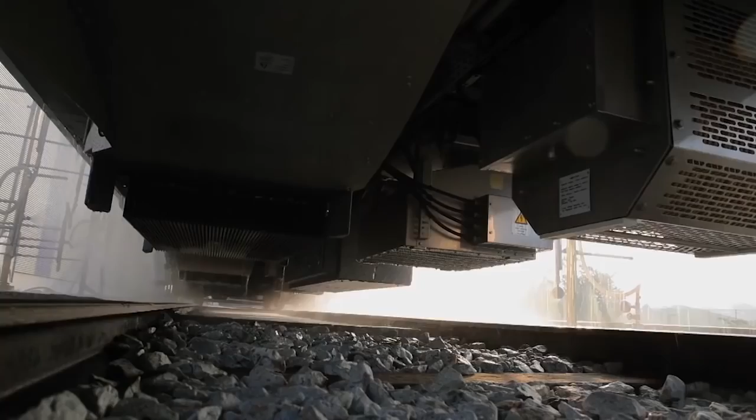After all the components are installed, the trains will go through a series of tests to ensure that everything is in place and installed precisely. We have tens of thousands of wires to be tested. So we have this computerized wiring testing machine. It can test the functionality, the insulation and the continuity of all those wires automatically. The trains are also put through a water test. We will carry out the so-called water test to make sure that when the trains are put into service later, they will not leak under the heavy rain of Malaysia.

After all tests are carried out, the completed train sets are transported to the Sungai Buloh depot. With a size of 162 acres, it is the biggest train depot in Southeast Asia. This depot can house 60 trains of Line 1, and we can also accommodate more than another 40 trains for Line 2. So it is a huge depot, and it has all the equipment that can support the overhaul and heavy maintenance in addition to the light maintenance of the trains for Line 1 and Line 2.

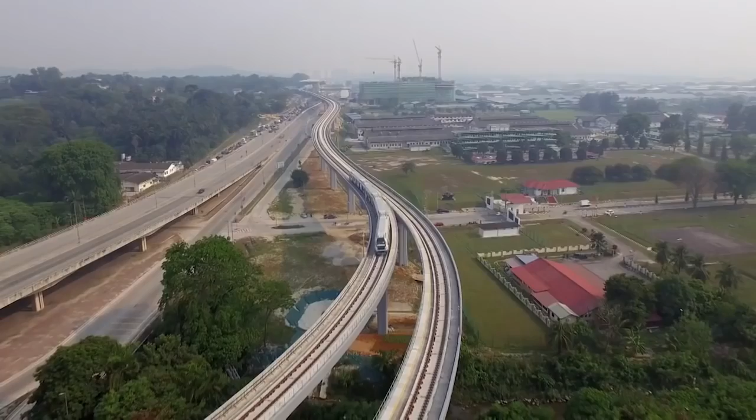At the Sungai Buloh depot, trains are programmed to commence testing daily according to the actual schedule of the trains. After a whole day of dynamic testing along the 1-kilometer testing track, the trains then return to their designated parking space at the train stabling yard. To further test the system that is in place, the trains are taken to the main line to be tested on the tracks.

We've now put a train actually on the viaduct to do some tests, and the public will actually see that at the beginning, starting very slowly, building up, but eventually will be running quite reasonably fast over a section, to demonstrate that the train can meet its speed. So this is another good achievement.

The trains are of the latest technology. Its state-of-the-art integrated train automation system will ensure a reliable and a highly efficient operation. One feature of our MRT system here is that we use a driverless system. So all the trains can be operated automatically by themselves. It's one of the longest fully automatic MRT systems in the world.

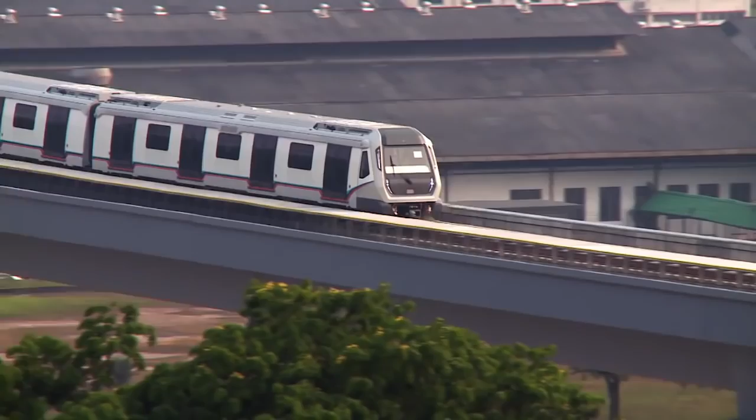Each train is made up of 4 cars with a width of 3.1 meters. They are able to accommodate up to 1,500 passengers per ride. We can run 33 trains per hour. So in each direction during the peak hour, we can carry 40,000 passengers per hour. So you can imagine from both directions, we can actually carry 80,000 passengers into the city center. And we are taking away tens of thousands of cars from the city center, which is a tremendous saving to the environment.

Dynamic maps displayed all over the train give real-time information for the passengers. You can see the stations, and the next station, and also other video that can introduce what is around the area, okay, and which side of the door will open. So it's very informative and it's configurable, very user-friendly. Unlike the old days, you have only dots to show where it is.

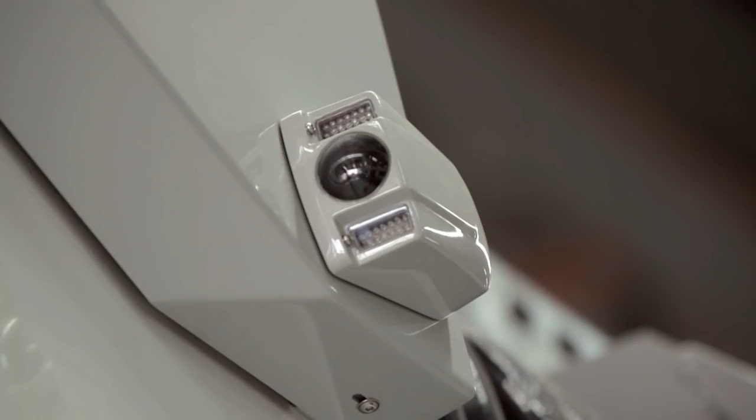The trains are also equipped with enhanced safety features, with surveillance cameras installed on the outside and inside of the train. We have 42 cameras per train, so we make sure that the passengers on board are safe and they will feel the security of it, and they will feel comfortable to travel on the train.

In the event of an emergency, the passengers are able to communicate with the control center via the built-in emergency intercom with an integrated camera. When a passenger pushes the button, the OCC operator will automatically see his face and see what is going wrong. So you can see that it is a very advanced feature. It's the latest application of this kind of technology. With enhanced safety and security put in place, the KV MRT trains also meet the international standards for fire protection.

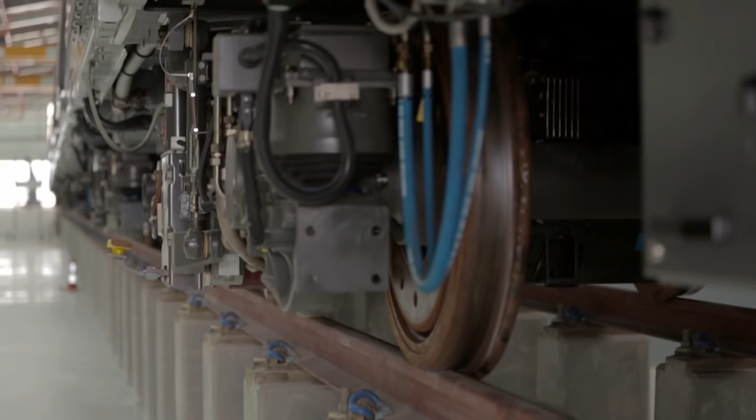The train is also designed to be environmentally friendly. It is built with sustainable materials and has high recyclability at the end of the train's service life. It also employs highly efficient air conditioning, lighting and braking systems that reduce energy consumption. As of June 2016, 37 trains have already been delivered and are currently stationed inside the train depot. On 11th November 2015, the Prime Minister of Malaysia, Datuk Seri Najib Tun Razak, visited the Sungai Buloh depot.